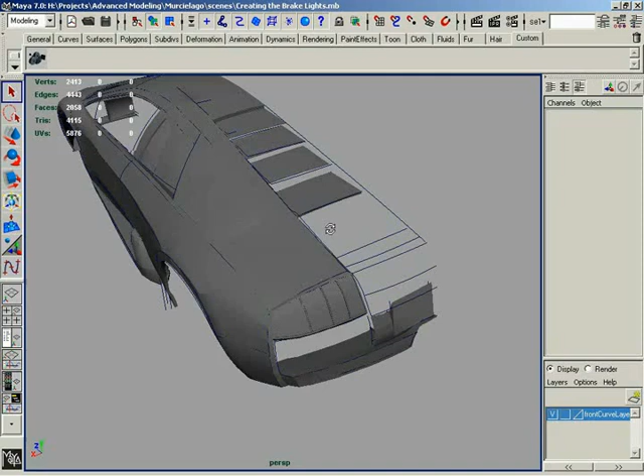Let's keep working on the back end of the model. We have a panel that sits flush inside this area. Rather than build this panel and match it to the curvature of this piece, I'm going to duplicate this piece, center up the pivot of the duplicate, slide it back a little, and make some adjustments. That should take care of everything I need.

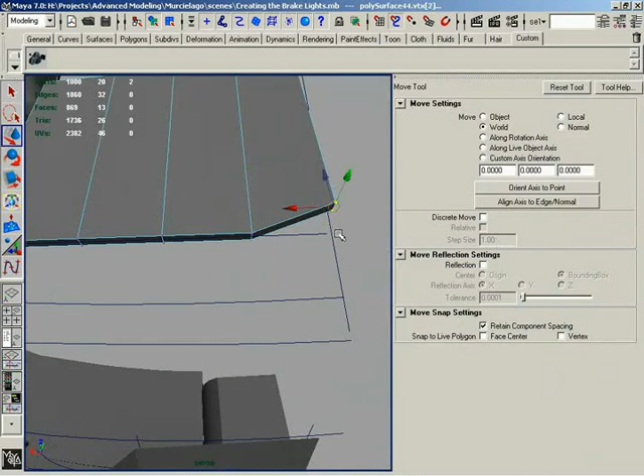Let's go ahead. Let me take my move settings and switch on retain component spacing for a minute. I'll curve snap these over, and I'll just snap all these guys over. Like so. Whoops.

Now I should be able to theoretically just drop this whole piece down just a few units, and that should line everybody up. And it does. So that takes care of that.

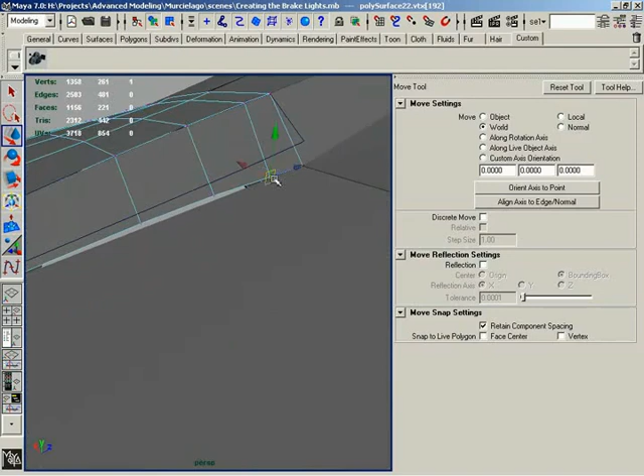There's a little bit of gappage right here, but that's because we need to adjust this a bit, and it probably wouldn't hurt to create a surface thickness extrusion. Let's start slowly. We'll curve snap these vertices back here to the polygon edges of this piece to close up the gap.

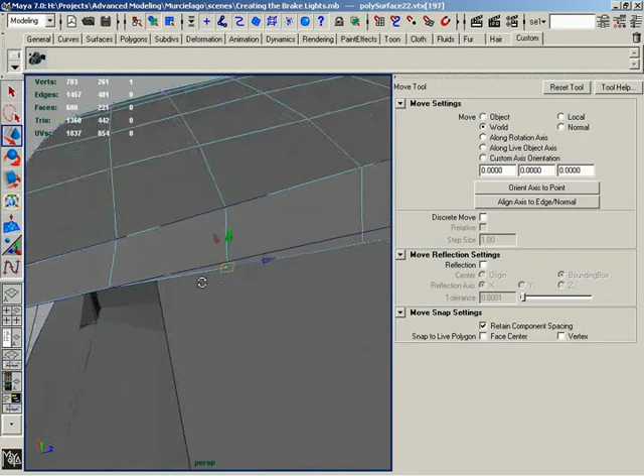And it looks like I have a little bit of cleaning to do here. Let's kind of flatten that out a bit.

Let's take a look at the top view for a moment. We'll pull this forward so it straightens up in this direction. Okay, I think that'll make a good start for this piece.

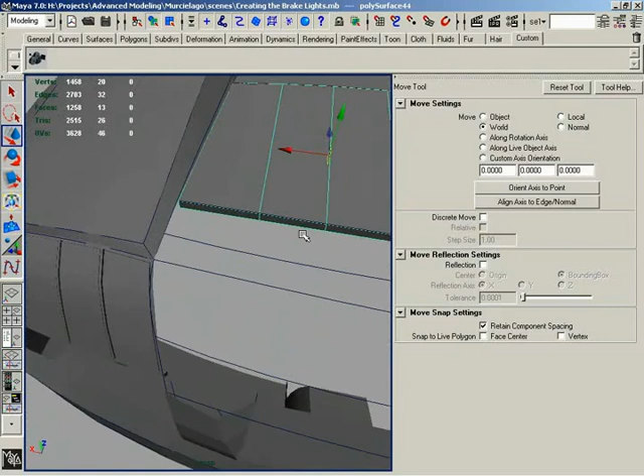Now this next piece is very similar, but we'll go ahead and build it out of a separate piece of geometry. This has got a slight curvature to it here in the back, and this is a piece that's going to fold up like an aerodynamic surface as we get driving.

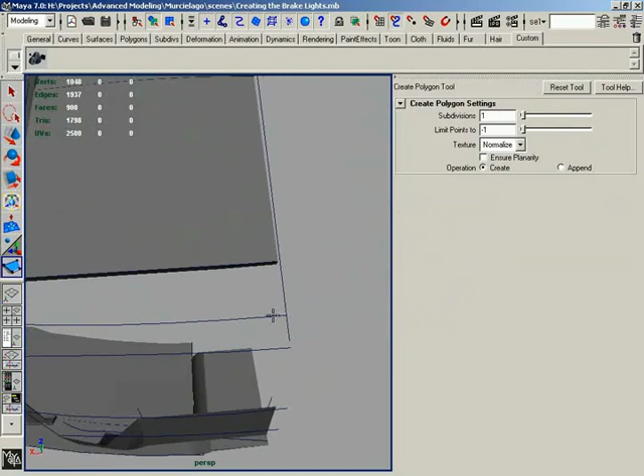Let's go ahead, I'll deselect everything, hold down Shift, right mouse, and grab the Create Polygon tool, and we'll create us a polygon. Now it looks like I'm a little bit off here and there, but that's okay. We'll straighten things up as we go.

Now, if I come back here to the back of my car, it looks like I've created a bit of a slant back here at the back, which I'm okay with, but I'm wondering if maybe it's just a little bit too much of one. It probably won't make that much of a difference.

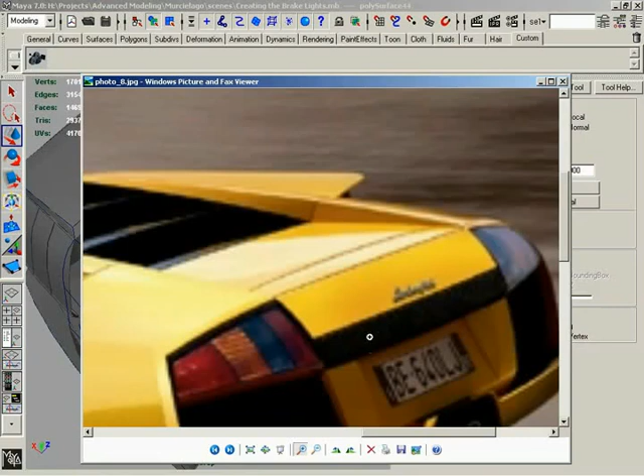Now I do see one thing that interests me. Let me see if I can find another shot of the back of the car. This whole panel that I'm working on now, this strip you see across here, is going to pretty much blend right into the curved area in the back where we have the Lamborghini emblem.

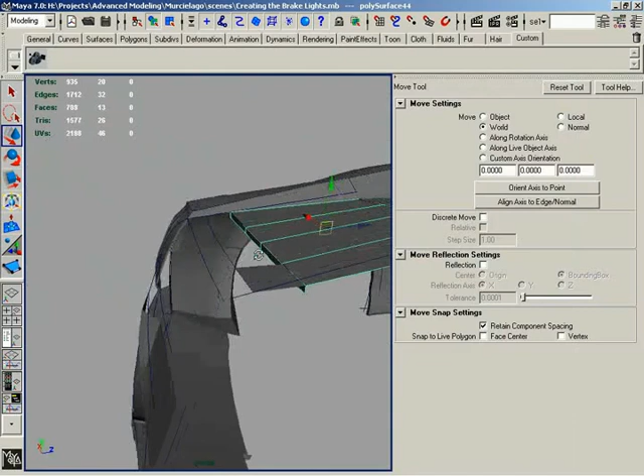If we follow the curve layout that I've created thus far, you'll notice it doesn't really account for that. So what I'm going to have to do is start improvising a little bit.

Let's take this curve that I've been using. I'll nuke out this polygon I made a second ago, since that's not really going to help me right now. Let's take this curve, and we can probably just delete it.

We can grab all of the vertices of this piece back here. Let's go to the top view for just a moment, and we'll slide these up a little bit, because what we have suggested in the drawing and what's actually going on are in effect two different things.

Yeah, so we'll pull this back to about here. I believe that'll work just fine.

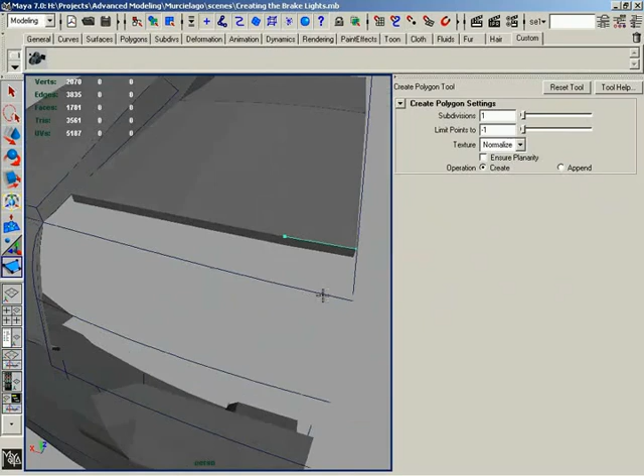Now let's grab our Create Polygon tool again, and this time I will point snap up here, and then we'll curve snap, so we'll create our piece further back here toward the back. It looks like that's going to work out just fine. No worries.

Okay, from here let's grab the Append to Polygon tool, and I'll do mostly curve snapping so I can get onto polygon edges. Just making sure I tilt the camera to the right angle to accommodate that.

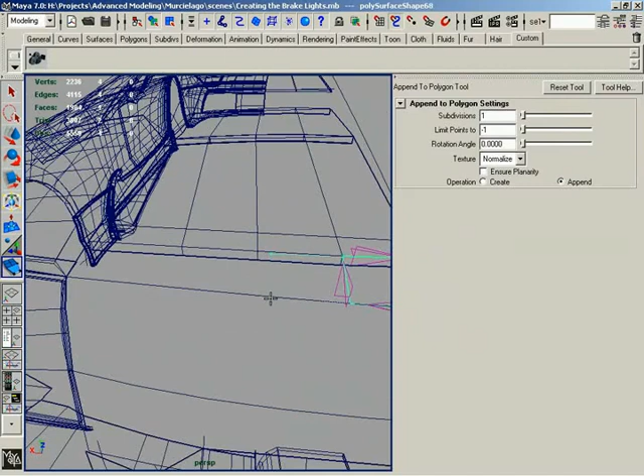And it doesn't really want to hit that. Maybe if I go to wireframe, yeah, it seems to help out quite a bit. I guess not.

Alrighty, well we won't stress about it too much. Let's just go ahead and point snap for now, and then I'll curve snap out here. And then point snap, curve snap, point snap, edge, point snap, and curve snap.

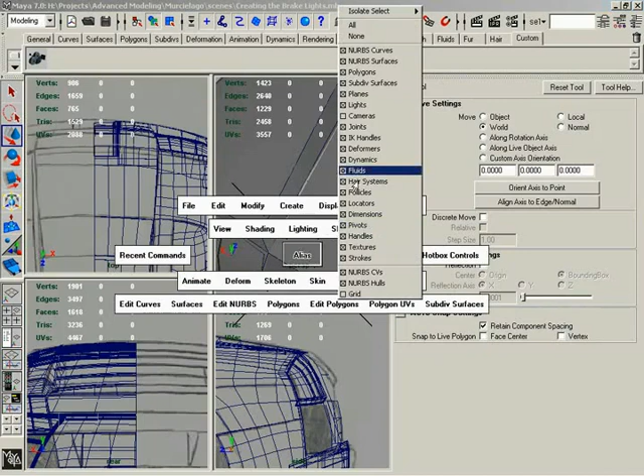Okay, so there's the beginnings of the piece. Looks like we still have a little bit of a gap here. I'm going to grab my viewport settings real quick, and let's go to show. I'm going to switch off NURBS curves for just a minute, because I don't accidentally want to snap to a NURBS curve. And let's snap these vertices right here against these polygon edges like I tried to do in the first place. That should work a whole lot better.

Notice I just control-clicked on the yellow triangle of the Move manipulator so that I can move efficiently in all three axes. And that should help out. And grab this vertex, and we'll snap it right there. Okay, so that should take care of that.

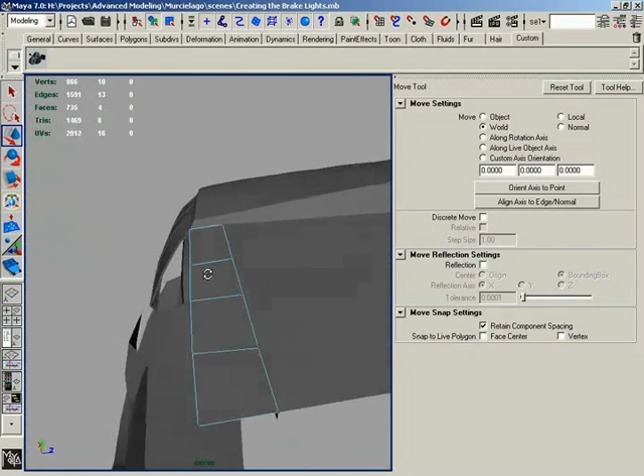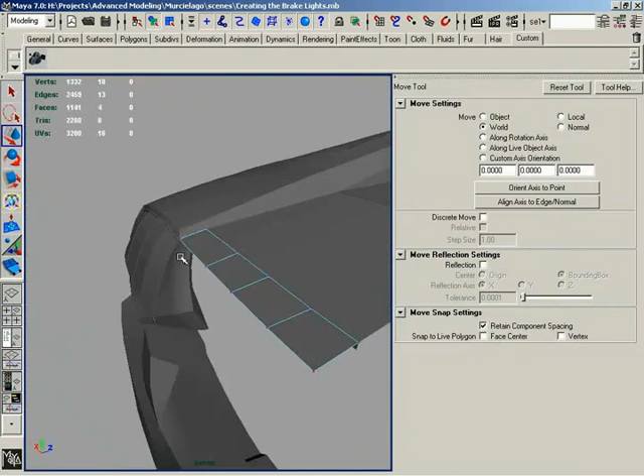I'm going to grab all of these faces, and we'll do a quick extrusion and add some thickness to this. Delete out that internal face, and I'm going to grab all of these edges here at the bottom front, and we'll pull these down a little bit. Press F8, get my move tool, let's go to modify, center up the pivot, and then I'll take the pivot and slide it forward a bit, and now we could rotate this up like you do.

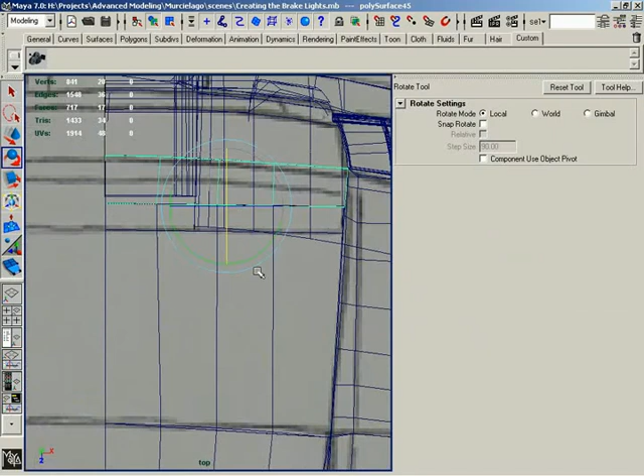Now, it wouldn't be a bad idea probably to make sure that all of these are in a nice straight line. So what I'm going to do is grab all of the vertices of this piece, and I'm going to pull them back a bit. Now, let's see. I can't really see my grid anywhere, but that's okay. I'm going to click on the Z-axis and then just snap. Let's make sure I switch off retain component spacing first. So there we go. Now that gets everybody nice and straightly aligned.

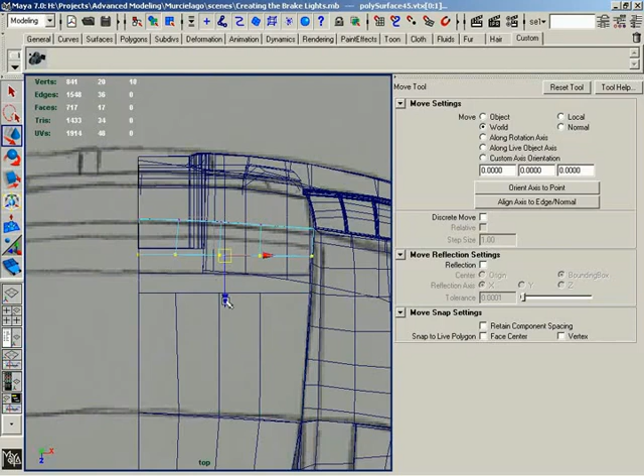Probably wouldn't be a bad move to do the same thing to this piece I just created. And we'll just hold down X and snap these somewhere nearby. And pull them up. And then we'll pull these up to meet. If there's a tiny amount of gappage there, it's not really going to cause any problems.

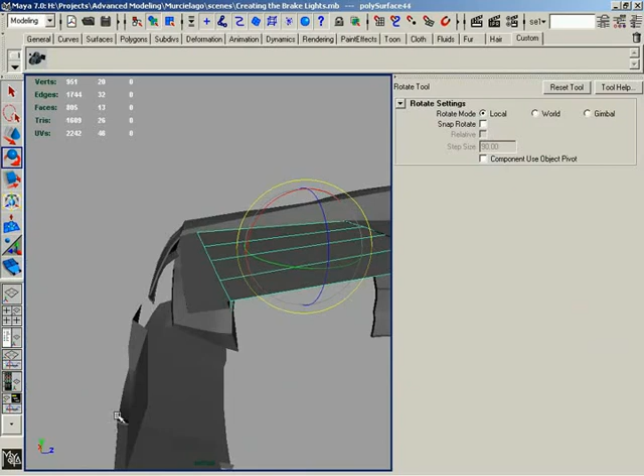Now, this piece, when it rotates up, there's a little receded area, I think is what I was trying to say there, that is underneath this. So what we're going to do is create that receded piece from this panel back here in the back. We'll bring it back up, and then use what we've created there to create the little nameplate area at the back of the car, because in the end, of course, that'd just be a few edge extrusions.

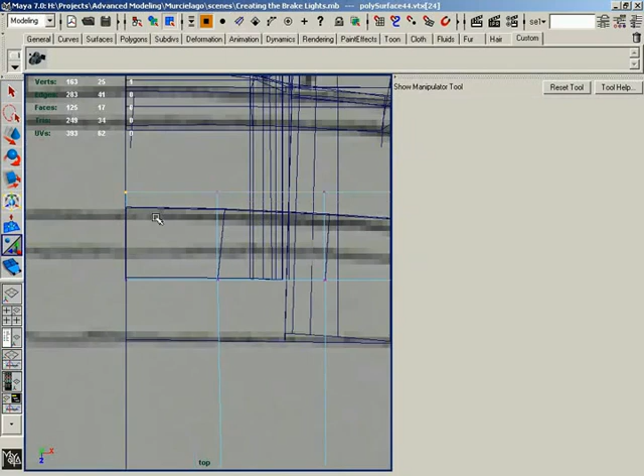So let's grab all these, right mouse, extrude these edges, and we'll pull them back down just a bit. In fact, I'm going to pull them way out beyond, and we'll use the top view to line them up a little bit better. Let them go out just a little bit beyond so that the crevice within which this panel rests is big enough to accommodate it with just a little bit of gappage so nothing rubs.

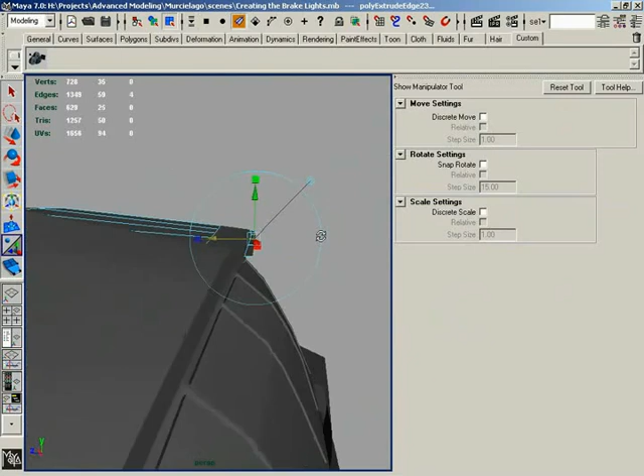Okay. Let's grab all of these edges again. Extrude them. This time we'll just pick them up a bit. And we'll extrude again, slide them back. Just a hair. Yeah, I think this is going to work out really well. And now we just need to slope these downward.

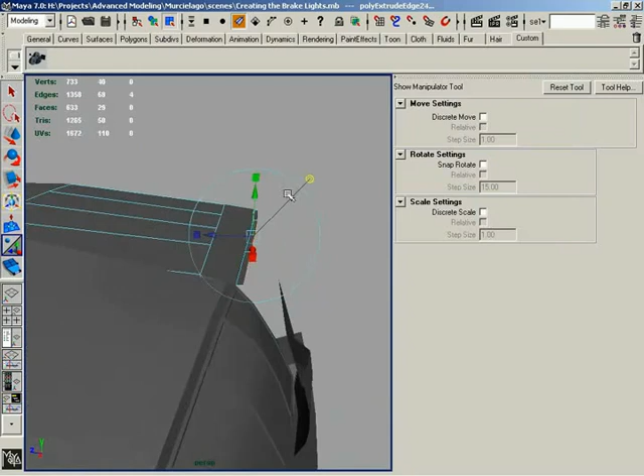So let's go ahead and I'll control click on the x-axis. We'll pull this out once. And world axis again, twice. And that's pretty close, actually. 2 would give us the rounding we're looking for? Yeah, we'll go with it, and then if I change my mind later, of course, we'll just make adjustments when the time comes. And it's lining up pretty well with the drawing, so I can't really complain too much there.

Let's grab some vertices, though, and do some tweak and adjustments. We have some thickness we should work on.

Now we have an interesting situation here where if we were to cap off this area just right in between these edges, we'd probably end up with some bad geometry. It'd be a T-style geometry, which as we know is non-manifold.

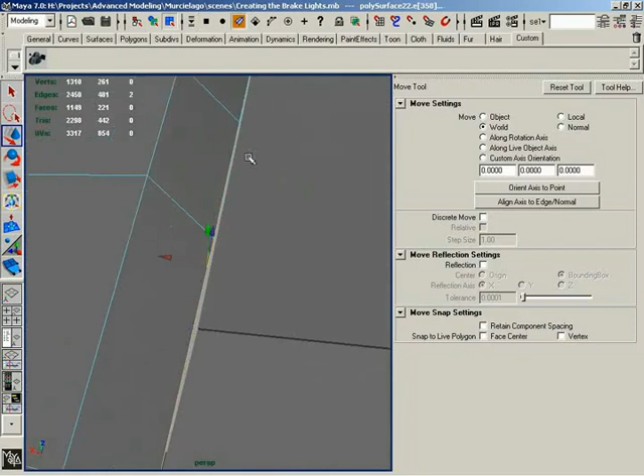So what we'll do is grab the fender back here and create that thickness extrusion we were talking about earlier. Just extrude this straight down. And we can probably grab this vertex, snap it here, grab these two verts together, merge them, and create an average distance in between the two, something primarily down. I think that'll work just fine in this case.

That'll need to be cleaned up when we smooth, but for now everything seems to be in order. Okay, now back over here.

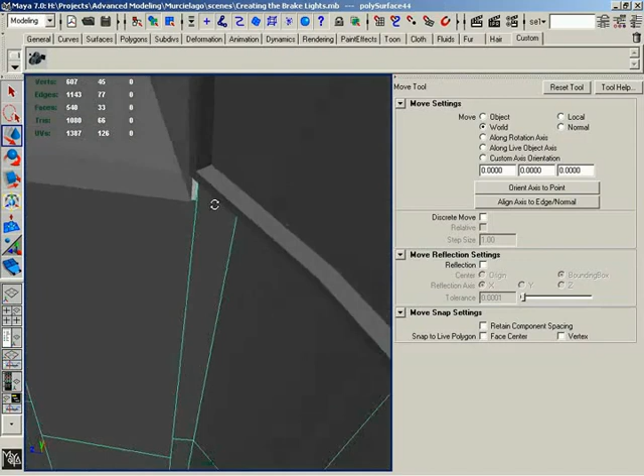Should probably grab this edge here and pull that in tightly. Now if there's the tiniest of gaps right here, I'm not going to stress about it too much at the moment, though I can clear some of it up just by moving that over.

And it looks like somehow this vertex got a little bit out of hand, so we'll lift that up. Wait a minute, I think I see what happened. Yeah, we're going to have to pull that down. Or you could probably pull this guy up, maybe. Maybe not. Yeah, it's because of that dip right there.

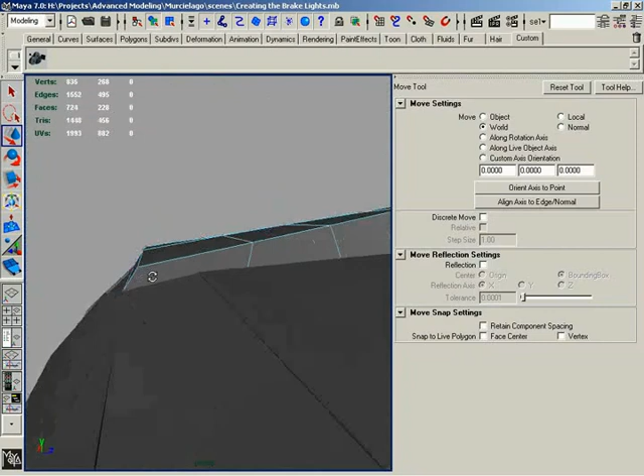Let's kind of slide along. Yeah, a little bit of compensation won't hurt. So we'll take this vertex and push it down a little bit, and then I'll just tweak these verts out a little to help make up for it.

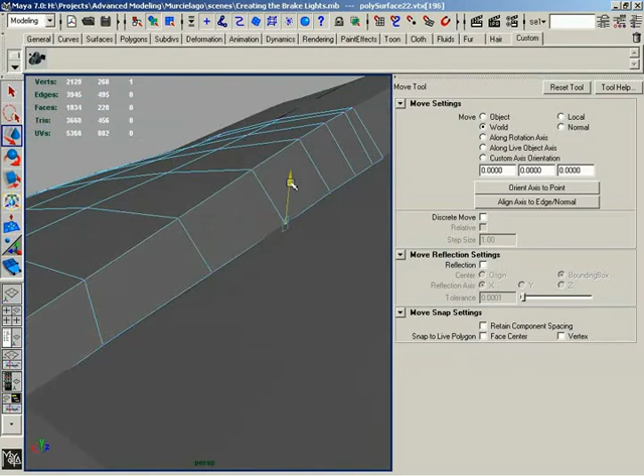Because we want these edges to meet each other as straight as we can. Now that does mean we need to grab the verts here at the edge of the wing and pull these down as well. And we can pull these over to help close this gap up.

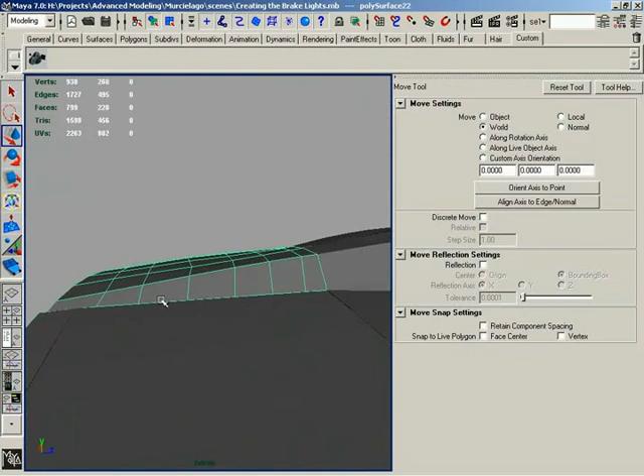So what I'll do is grab the split edge ring tool, and I'll put just a couple of pieces of detail in here so we can create some very subtle rounding as we move toward the back, which in the grand scheme of things will probably be a little more accurate to the car in the first place.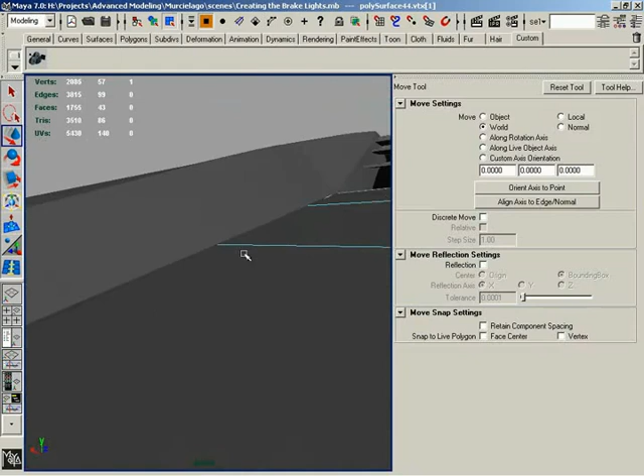We can pull this up a little bit. Pull this up a little bit. Whoops. And pull that up a little bit as well.

Okay, alright, and then this still kind of lifts up. Need to move that pivot point to a more precise location, but that's not all that big of a deal at the moment.

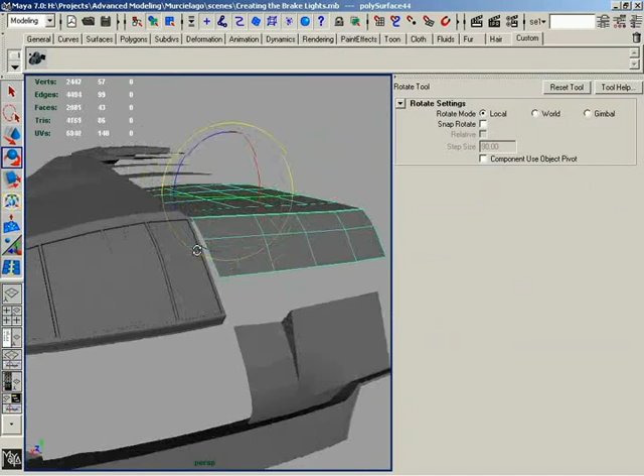Okay, now back over here, now that we've cleaned a lot of that up. Let's grab the vertex here at the bottom of this guy, pull him down. Grab the next vertex back, pull that down as well, so there's a nice big wide opening for our airfoil panel that we've got in here.

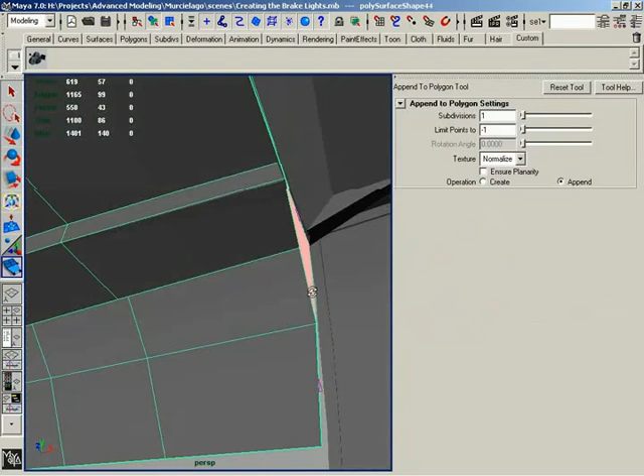I'm going to grab the append to polygon tool and see what happens if I just append to there. It doesn't look like it's really what I want to happen, so we'll undo that.

And instead, we'll just grab these three edges, extrude them inward like so, and I need to do a little bit of cleaning.

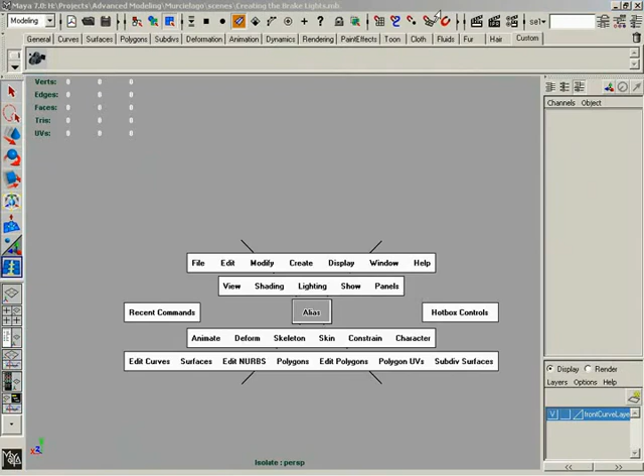Let me grab this object just so everybody can see what I'm doing. And let's do a show, isolate select, view selected. I guess I had nothing selected when I did that, so let's turn that back off, and try it while selecting something. Probably help quite a bit.

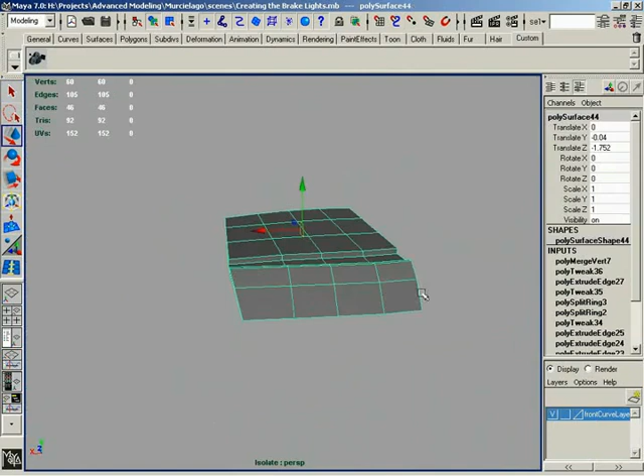Alright, now let's see from here. Snap. Merge. Okay, so now you can see what we have. We've got the gap within which our little wing piece is going to lay. We've got the sort of emblem area back here where we could put Lamborghini later on.

Probably a good idea to also create some thickness off these edges back here at the back. So, well, actually I don't want to hit G, I want to grab extrude edge, and we'll slide these forward, like so. Switch over to vertices. I want that vertex, and we can just snap it right there, merge the two together.

Let's delete out the history on this object. Now what were to happen, just out of curiosity, if we were to try to smooth this out? Well, we get something kind of like that, which doesn't look all that hot right now, but after we make a few adjustments, will probably work out just fine.

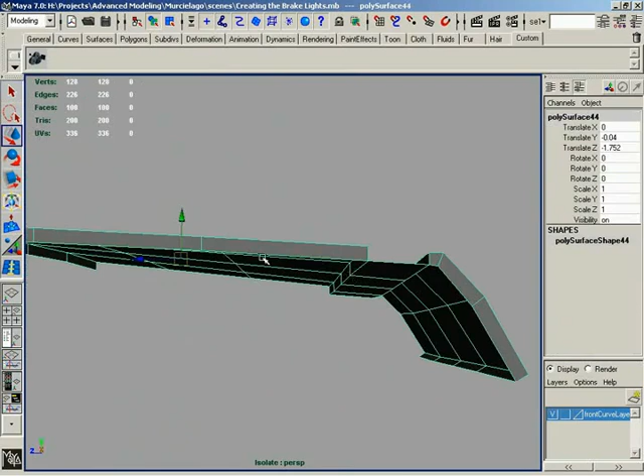What I think might be a good idea in this case is to grab all of these edges around the side. Maybe go ahead and grab these two just for continuity's sake. We're going to do a minor edge extrusion on all of them at once. Now in that case, it did reasonably well, so we'll go with it, and then we'll just clean everything up here.

So let me grab some vertices. Let's frame up on them so we can move them. And I'll snap them over in X.

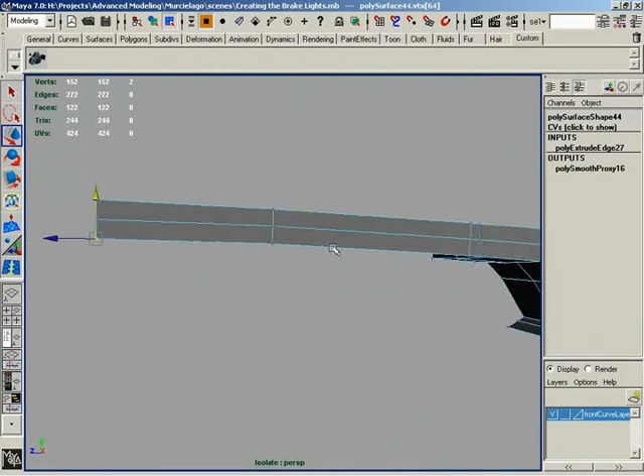Now the reason for this will be really apparent if you check your smooth again. Go ahead and tweak some of these out first, because basically it cleaned up some of what was going on there at the corner. Now, we won't be able to pull that out unless we make another, or a series of creases, which we're not going to worry about right at the moment.

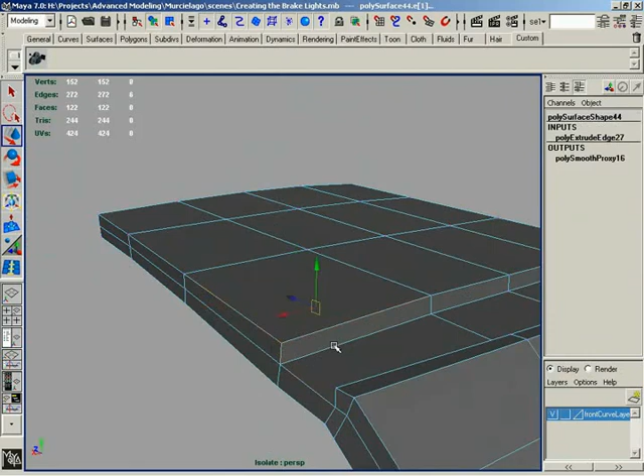Because what we may end up doing is beveling these edges out. Let's just run a quick test, which I will probably undo, but we'll just kind of see what this will look like if we were to bevel all of these edges. Probably bevel this one as well. Definitely bevel this one. All the way back here, and here, here, here, and here. Okay, and bevel.

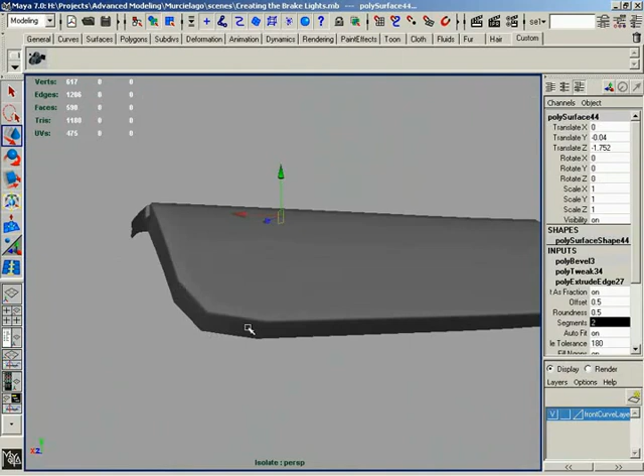Now, we got a couple of triangles there, but if we switch over to the smooth, I've definitely seen worse. If we take the bevel and set its segments up to 2, everything becomes a bit more defined. It looks like we might have to clean up a few normals, but overall, that's not bad at all. I mean, yeah, some creasing will need to be done here or something because we're rounding off too much, but overall, just looking at the clarity we have at the internal part of the shape, that will likely be our guy right there. That'll be what we'll do.

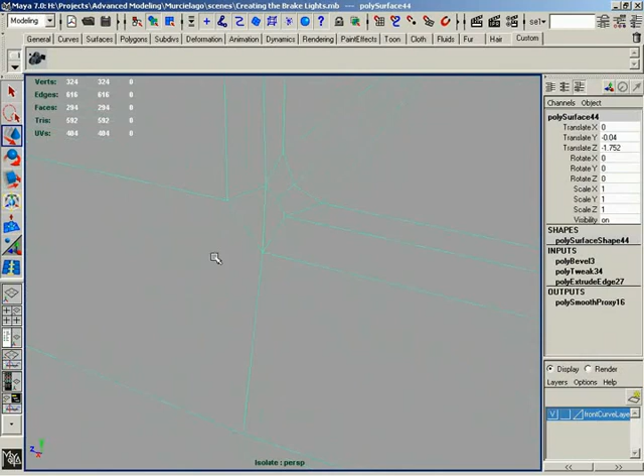And depending on how we handle areas like this, now this looks a little bit nasty, and we'll probably have to go in and figure out exactly why. Let's maybe switch back over. Oh yeah, this is probably it right here. Yeah, because there's some bit of craziness taking place here, so we'd have to clean this up. I'm going to undo that for the time being, though, because I don't want to bevel anything just yet.

This is just something I was thinking about earlier, and it might provide us a nice way to create the creasing that we're shooting for all across our model without having to add a terrific amount of detail at the smooth level. By that I mean we don't have to add a whole lot of smooth divisions. If we'll go through and take anywhere we want a nice rounded crease, bevel it out, then switch over to one iteration of smoothing, probably work out the best for us.

Okay, so let's switch off the show, isolate, select stuff. That can all go away. And, yeah, I think things are looking pretty nice right now.

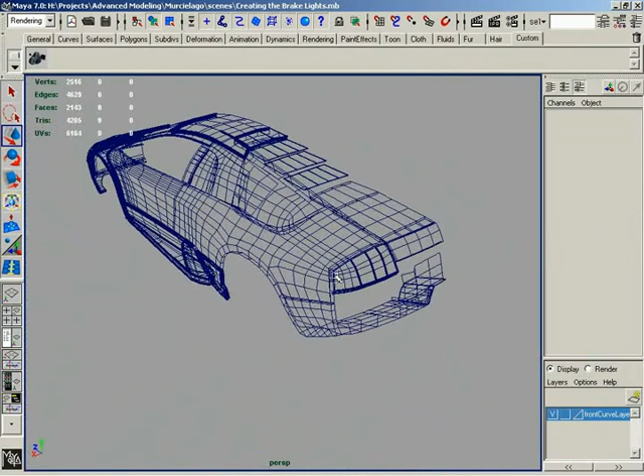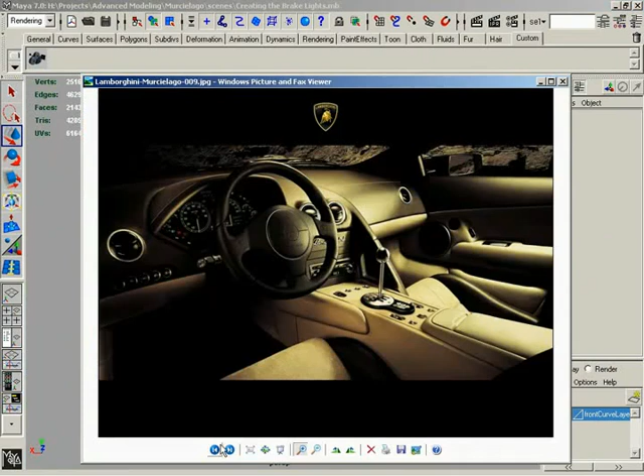Let's take a look at this little piece that kind of fills in back here. It should be relatively simple. Let's see if I got a nice picture of it. I got that one where the cars drive. Actually, this one will help, but everything's too dark here. It's all completely in shadow. I got that one where the car's driving away from us.

Okay, now let's see. Let's hit 5, and let's see about this. We need to probably grab the edges at the back of this fellow and extrude these inward.

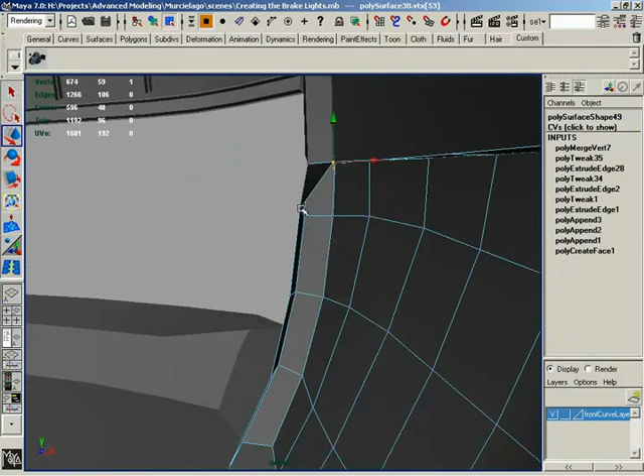Let's frame up on those edges and clean up some vertices so we can snap that vertex in. Get those two merged together. And we'll probably just pull this out a bit.

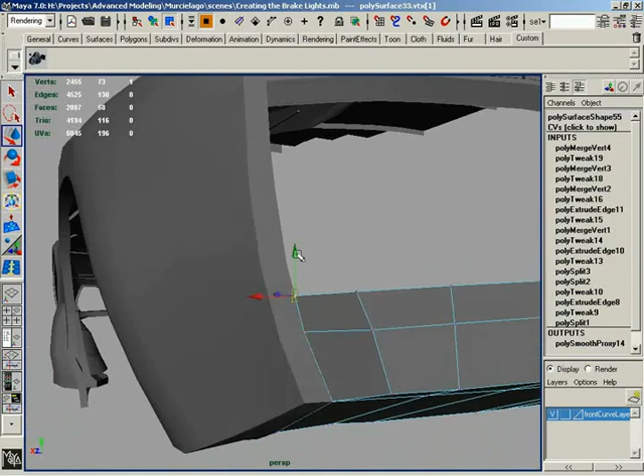And tug these out like so. Would probably be a good idea if our bumper came in a little bit more, so let me kind of pull this down, because we're losing a little bit of that angle.

So let's see, curve snap, like so, maybe down even a little bit further. That's probably closer to the real thing. Yeah, we just need to clean some of this up a little bit.

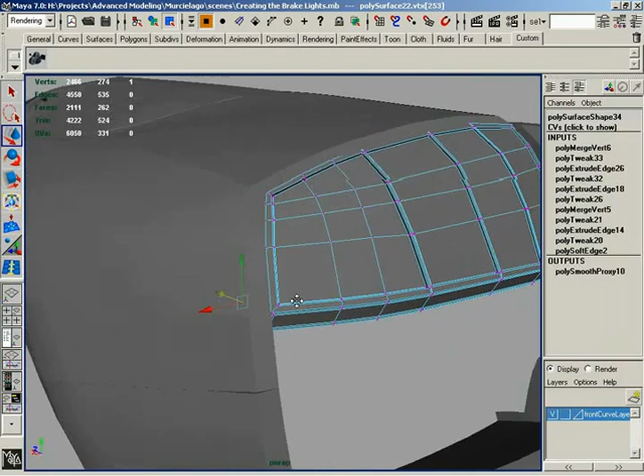Okay, now I'm sure we have a little bit of thickness coming off of this piece that we'll have to deal with sooner or later, so we might as well create that.

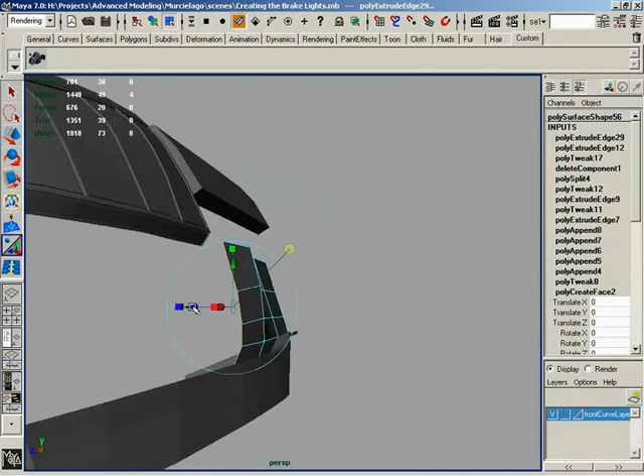Slide this forward and switch over to vertices. I'll pull this down. Okay, so now we just need to start creating this piece here across the back.

It will take just a moment, and because we need to kind of tuck it underneath this light, let's create a little more thickness for the light. Frame up here on this area. We'll just grab this edge all the way across.

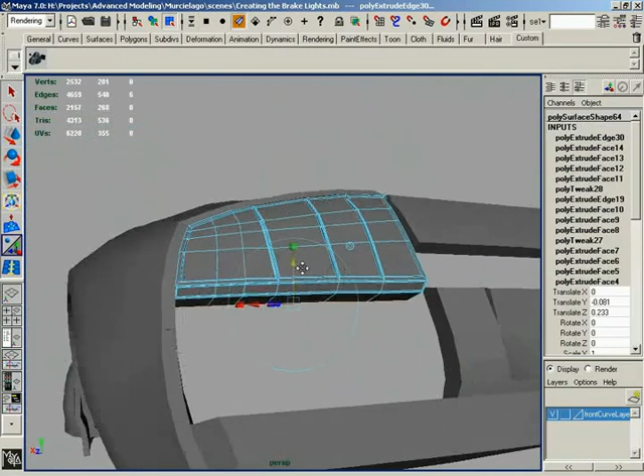Let's extrude it inward. Maybe down just a tad. There's some nice thickness to play with. Probably need to pull some of these edges back a little bit further, but I can make more assessments on that as we plug through this.

Okay, so to create this piece, now that I've done some setup for my surrounding surfaces, let's grab our... I've got my shelf back up, so I could start using it again. We could start off with a polygon plane. The cool thing about doing that is it gives us something, if I set my subdivisions down to 1, it's something that we can move and rotate into place fairly quickly.

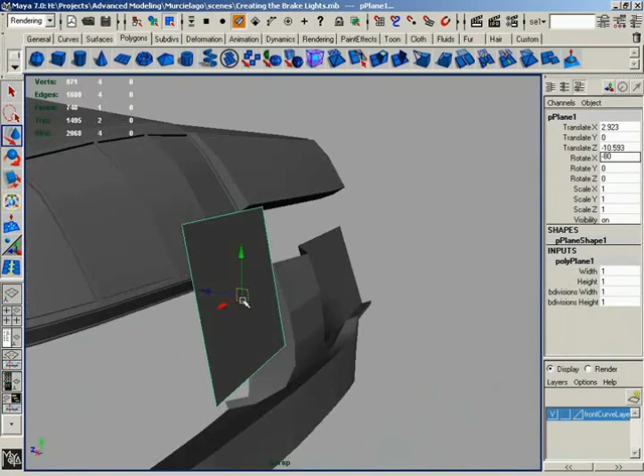So, push over here, frame up, rotate in X. We'll start off with about, well, 80's not really what I wanted. Let's try negative 80. I always get those confused, the positives and negatives on rotation if I'm just typing it in. So we know we need a little bit of inward slant just for starters.

Let's come over here to the rear view. And we can scale this and move it into the general shape of our opening. Give us something to start working with. And now let's go ahead and switch over to vertices and see what we can do.

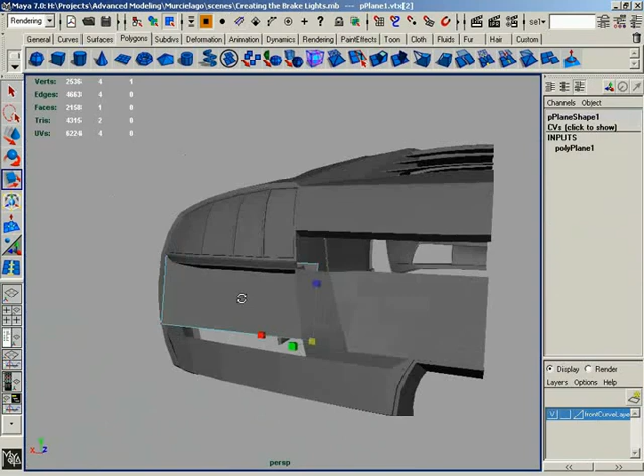So we'll slide this back. Let's frame up on it so I can see it a little bit better. Control click out on the Z axis. And we can do the same thing here, kind of tuck this up underneath.

And yeah, guys, we're going to need a lot of detail to wrap this up, but this is just to get us started with some sort of shape.

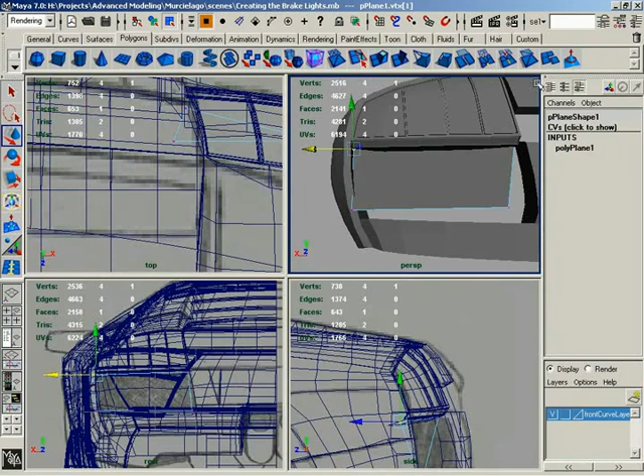Alright, let's take a look at our photo. It looks like, if you remember, there is a bit of a crease running along the bottom of this object that you can't really make out because of the angle of the camera. It looks like the crease in this rests just above it, and actually if we were pretty much in line with it, nobody would be the wiser, but we'll go ahead and pull this.

Over, so it will be about like so. Back here, we'll push in. Okay, starting to look kind of nice. Maybe lift it up a little bit higher.

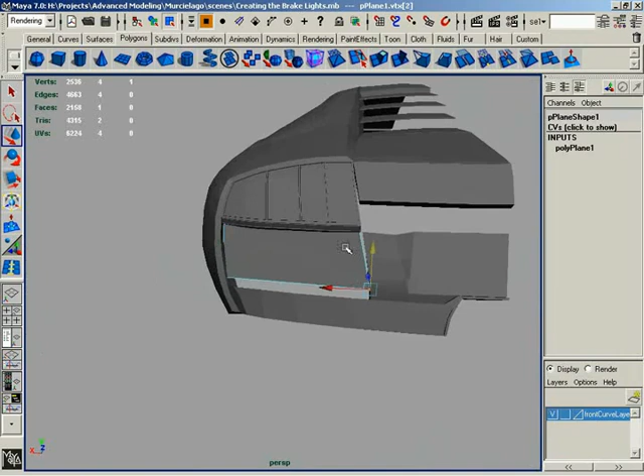And let's go over to object mode, shift, right mouse, grab the split edge ring tool, and we can add a little bit of detail. Now we don't want to deflatten this or deplanarize this, if you will.

But we do, however, want to be able to fill in for any curvature we have in any other direction, which is more important over here. So we want this to kind of fill in the blanks without leaving too much gappage. A little bit of gappage will go unnoticed in any sort of lighting, so no worries there.

Okay, so now let's do the same thing in the opposite direction. So boom, boom.

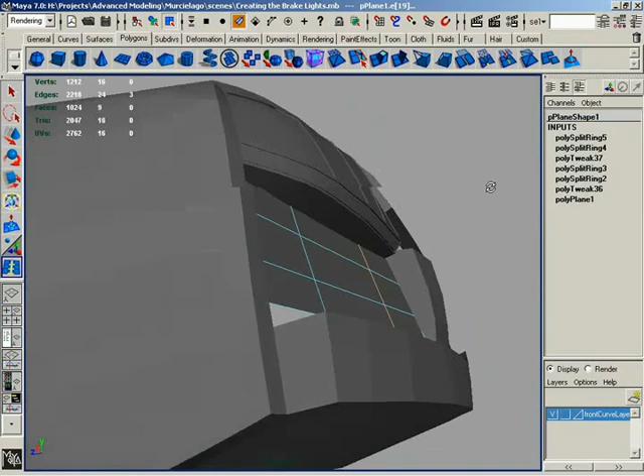I'm wondering if there really is any curvature here. There might just be total planarity across that. We don't really have any nice camera pan-arounds where we can tell for sure.

We know that there's a little bit of curvature here on the brake lights. Now, also, it looks kind of like we go into a straight line back here. So we could take that into account. It really is kind of tricky to say.

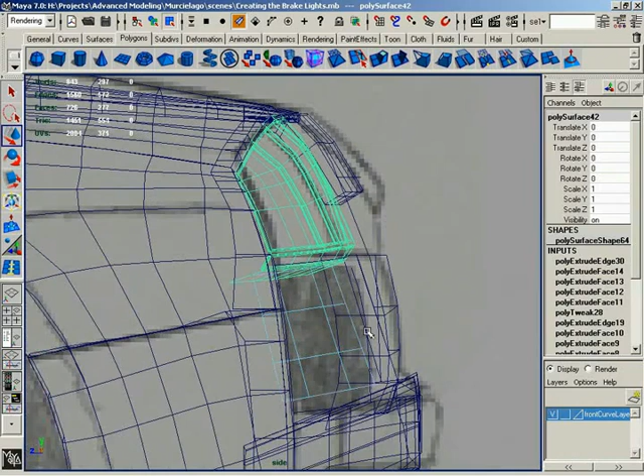If we come over here to the side view, we'll see that there's some suggested rounding going on. Now let's see if we can cross-reference that with anything we have toward the back of the car. Well, we can see there's some rounding there, and this is staying in parallel with it. So there's got to be some sort of rounding there, which is just kind of lost in that one photograph. So we'll go with it, and we'll create some rounding.

See if I can grab all those at once and make that a little bit easier on myself. And pull this out.

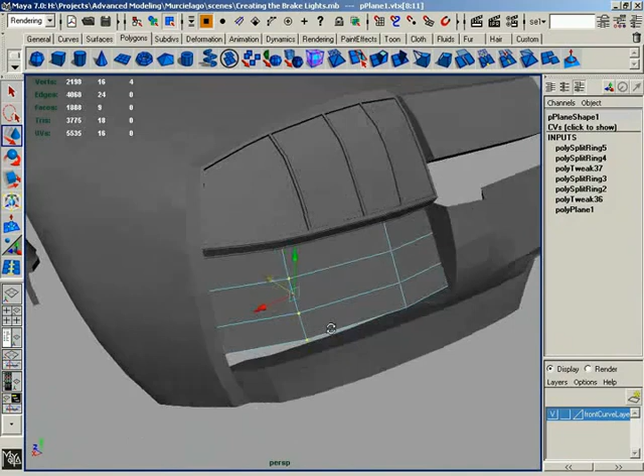Okay. Now we have that slant down toward the bottom, which looks like this might be a little bit too low.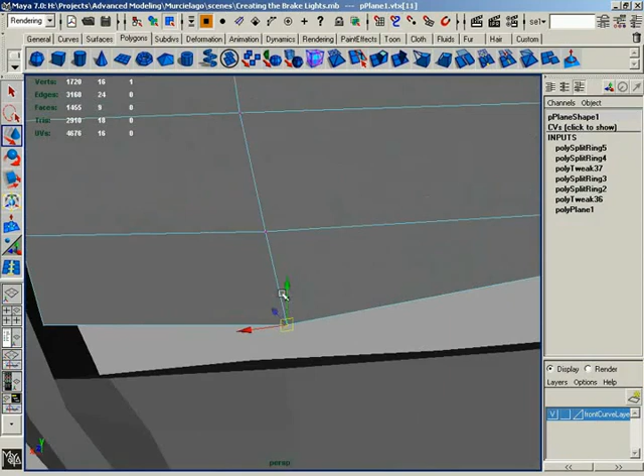So what I'm going to do is grab these vertices and slide these up. Notice I'm curve sliding so that I don't really change the surface detail too much. Whoops.

Make sure we get it on the right edge. Okay, now let's grab each of these. Now, just from what I saw over here, it looks like we're missing a little bit of curvature in the way this actually behaves. We also might have misinterpreted a bit of this shape, but I'll get to that here in just a moment. Right now, let's just kind of stick on where we are.

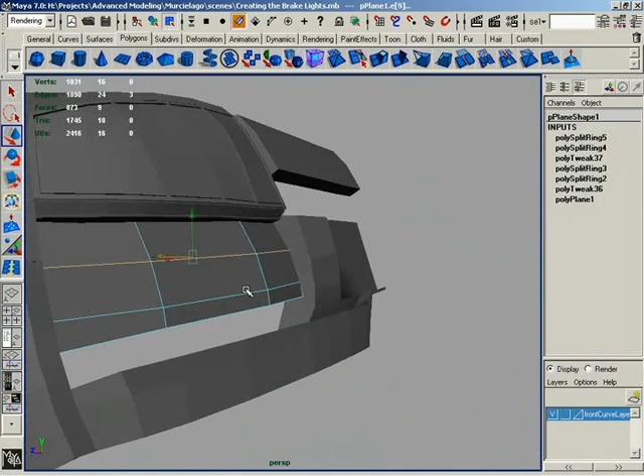So, grab all of these in this direction, slide them back.

Some tweaking to get the shape just the way I want it. Maybe this does fit right up underneath that. I could still cast a shadow from there.

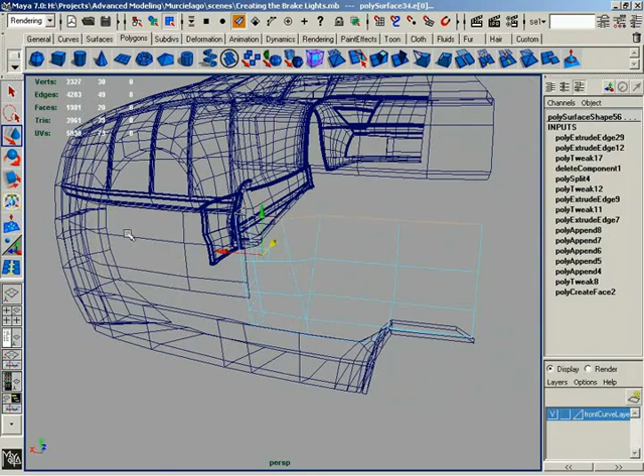And let's just say, for the sake of argument, that these just needed to lean back a bit. Now look, I've still got some of those edges selected over there, so let's make sure I deselect those. Just push these back for now. Or just grab these. Yeah, it probably works out better.

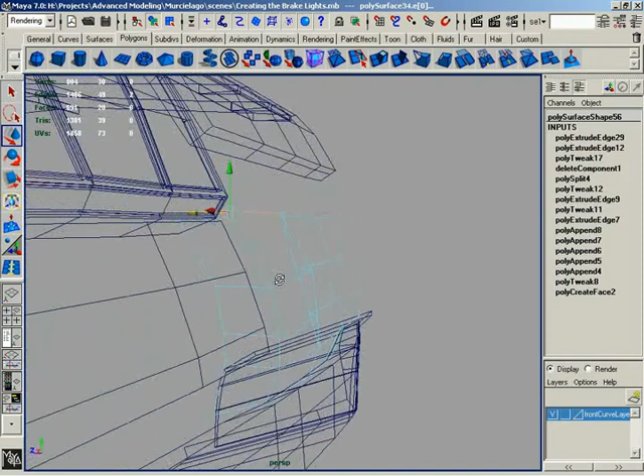Now let's reference that with the edge of what we see here. That seems to fit in a little bit better if we push that back. So I'm digging that. In fact, I could probably go back. No, that's about right.

So yeah, about midway along, and we can grab. Let's take this edge, we'll slide it back. This edge, we'll slide it back a little bit.

Let's shade back up, and we're starting to follow the curvature quite a bit more closely with the way that the actual piece is shaped. That's good. So it just boils down to having to look at something from multiple angles and figure out exactly how it's shaped.

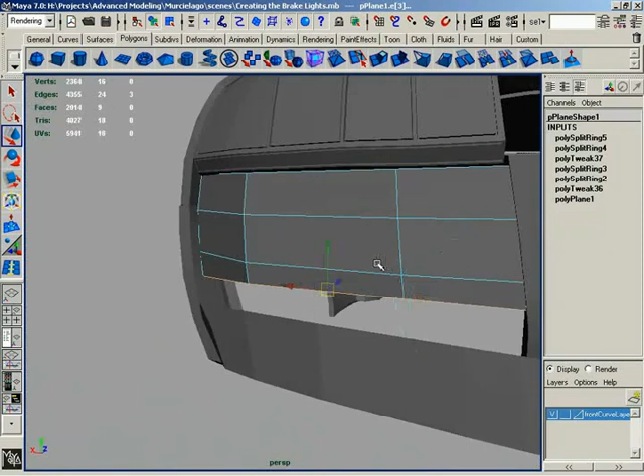And let's extrude these edges out, and we'll pull this down and forward, because we know we have that slant inward. We can pull this way down.

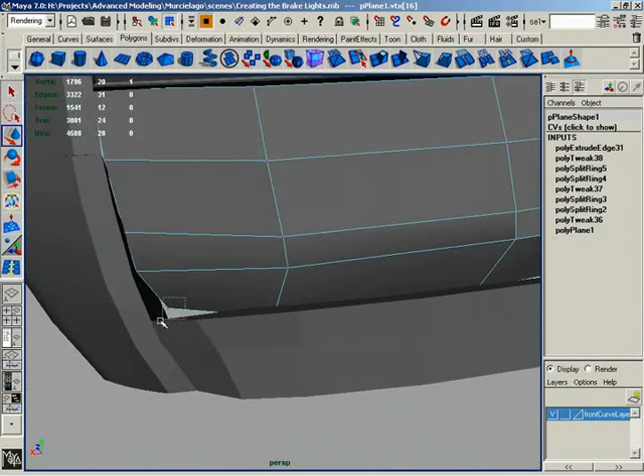If we come in here to the inside, start relocating vertices to fill in the detail appropriately, close up any major gaps that we see, like here. And some of that will have to be filled in by bringing the bumper edges back.

And I'll just grab these for now. I'll grab the rest of them later if I need to. Maybe I can just come over to right about where the license plate piece comes into play. And I'll extrude all of these. Let's go forward in Z.

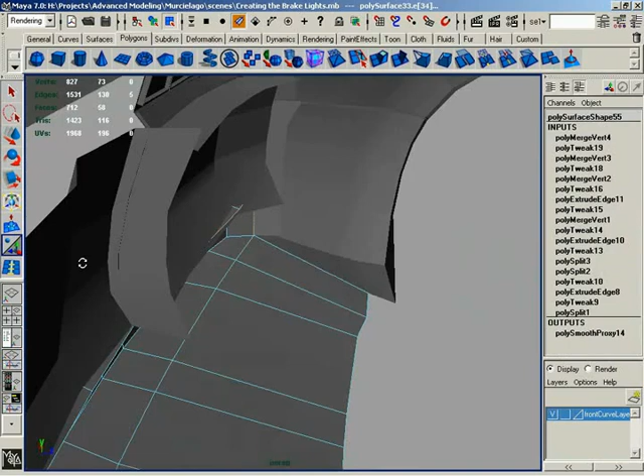Whoa, looks like I grabbed some more than I really meant to, doesn't it? Yeah, looks like I did. So let's undo that, deselect these edges, which I didn't want in the first place. And now let's try that again. Okay, that's a lot closer to what I was looking for.

I did miss something, but we can fill the blanks in on it here in just a moment. What I want to do is grab the vertices back here.

We could probably grab our trusty old split edge ring tool, make a split right about here that won't make any difference as far as that detail is concerned, but it will give us something we can kind of anchor to back here.

Then we could grab the append to polygon tool and fill in that blank with that edge that I forgot or missed, or if you want to look at it.

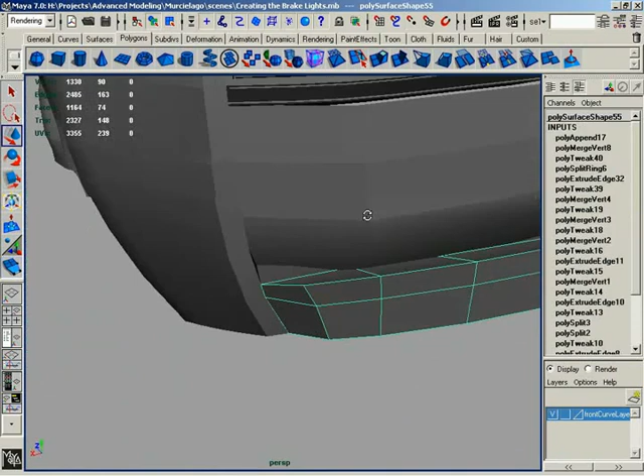And I guess from here it would all boil down to reshaping all of these edges to conform to the shape the bumper has when it enters into the body. There we go. So it just kind of creates a crevice in there, which is fine with me.

Now we can fill in this gap just a bit. Let's grab edges all the way down here, and I'll push these back just a hair.

Let's grab the split edge ring tool. I'll put one more edge of detail here, which I will pull forward to help kind of clear up some of the roundingness.

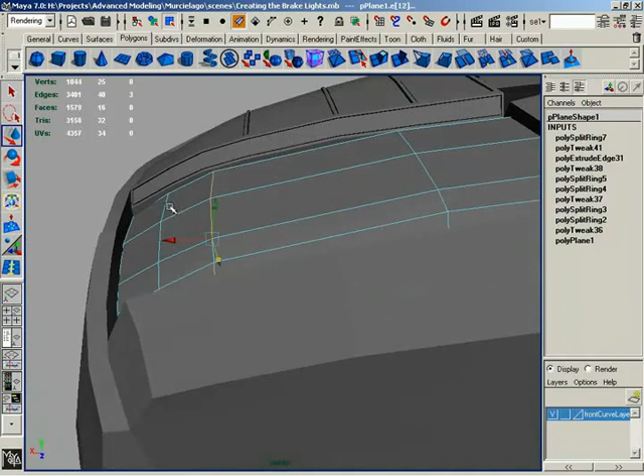There we go. Pull that up, and I'll pull these up just a little bit.

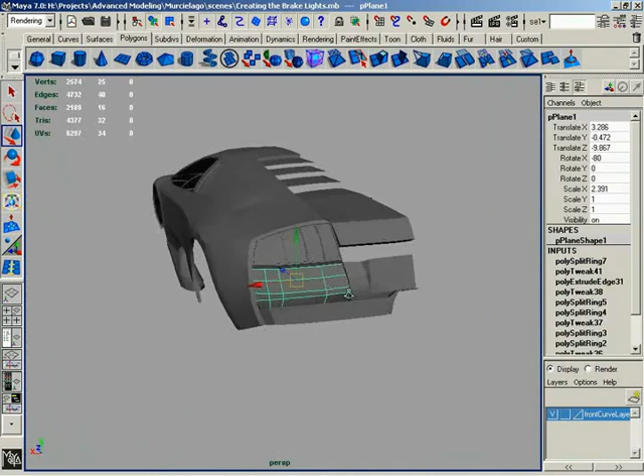Alright, and let's do the shift right mouse. Let's do soften to soften that up a bit. Could probably grab this edge all the way across for now and harden that back up and start to get kind of an idea of what this is meant to look like.